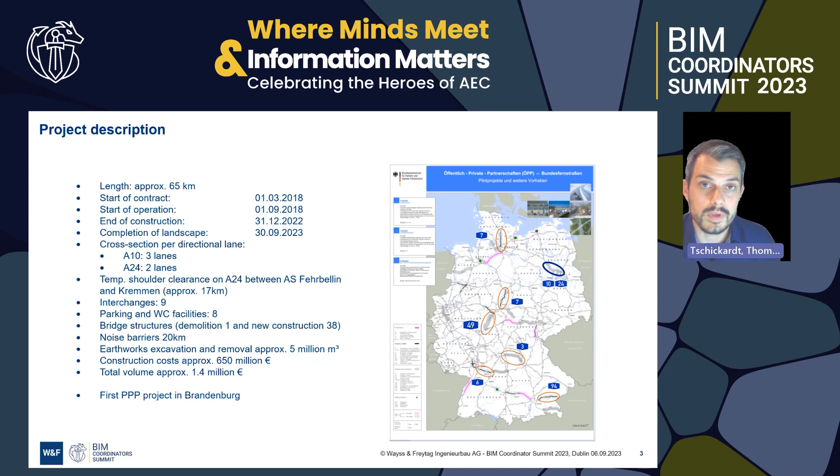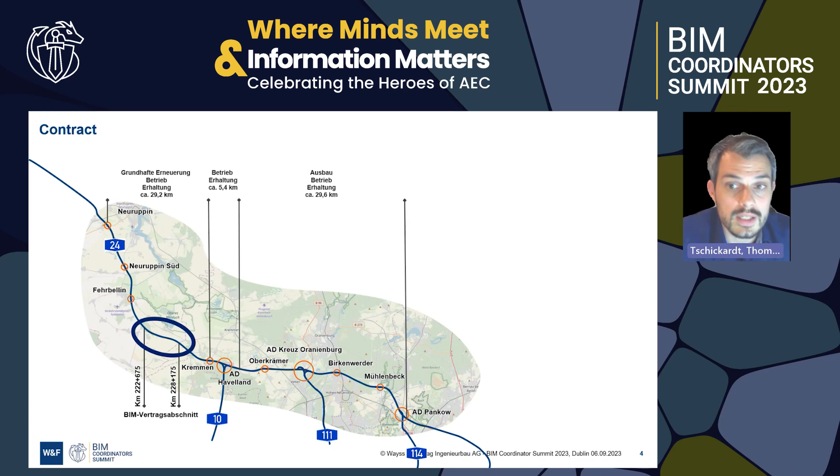The contractual route you can see here in the overview from Neuruppin to AD Pankow. The contractual requirement was to do 1 section with a BIM method. We chose the 4th section, which is now highlighted in yellow. We have highway construction of 5.5 kilometers, 1 bridge, a noise barrier wall, and 1 service station, Linumer Bruch Süd. But we also had to do the other side of the service station, Linumer Bruch Nord, as well.

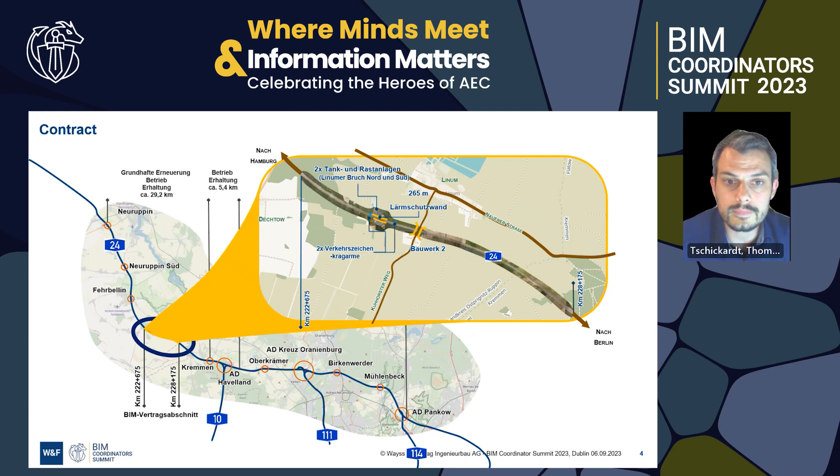Our project organization looks like this. The client was the federal government of Germany, represented by the Autobahn GmbH and also by Deges. Deges had 1 BIM manager. She was quite involved in the project, and I'm the BIM manager of the SPV, the Havellandautobahn GmbH and Co. KG, which was and still is responsible for the project. Our construction joint venture is Habau and Wayss Freytag, each 50%, and the operation and maintenance company consists of Habau as well, but also Invesis.

We decided to include 5 designers in the project for the terrain, for the soil, for the highway, for the tank and service area, but also for the civil engineering structures. And each designer had a BIM coordinator, but also a BIM modeler to produce the models.

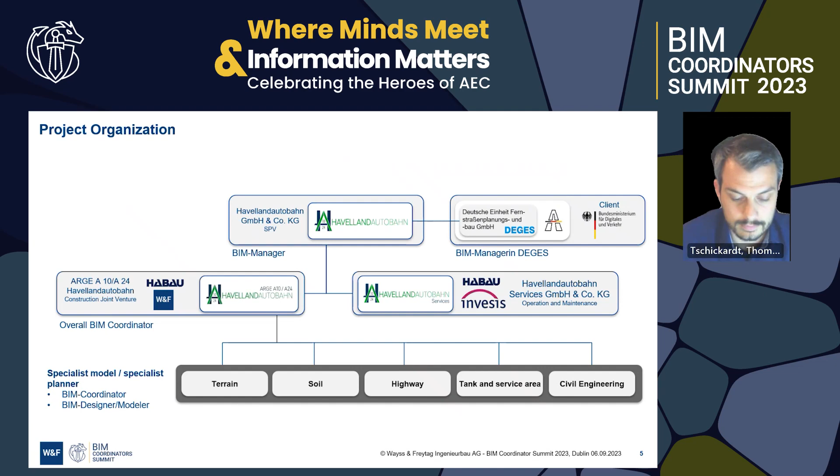Our BIM use cases around the life cycle are displayed in the background. I will show you our contractual requirements in the following slides, but what did we have to do? The generation of BIM documents was one of the BIM use cases. We had to do the creation and updating of the specialist model, model-based visualization, provision of the delivery objects according to ISO 19650, the BIM coordination in our CDE, and the derivation of 2D drawings from the special models.

We had to do a 4D construction sequence planning, but also the target-actual comparison. And we had to do the linking of all the drawings, plans, documents, photos with the model, like linked data. And in our operation and maintenance phase, the visualization of the maintenance measures and the visualization of results according to German standards. 2 additional BIM use cases were BIM to field, but also the 5D quantity takeoff and controlling.

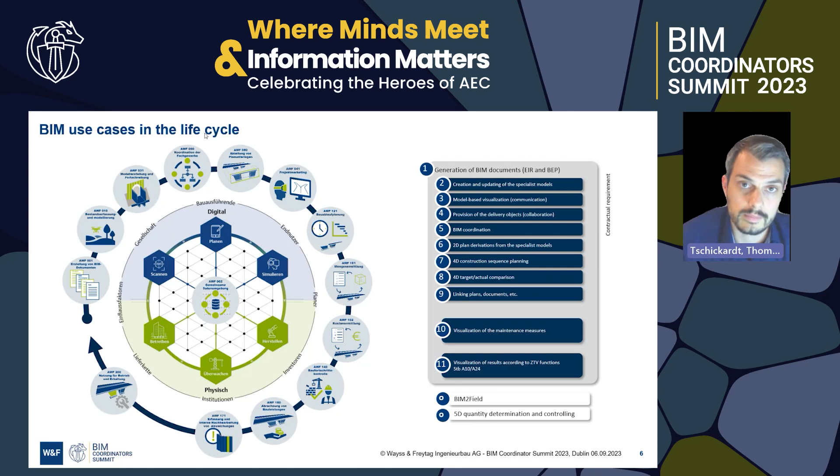The generation of the BIM documents was also one of our responsibilities. So 3 months after the beginning of the contract, we had to deliver the EIR because it was and still is a PPP project. And 6 months after the beginning, we had to deliver the BIM execution plan. And we updated the BIM execution plan 2 times during the construction phase, and also 1 time now after completion. So we're still working on the document because it's always changing or always getting better, and we want to optimize, of course, our workflows as well.

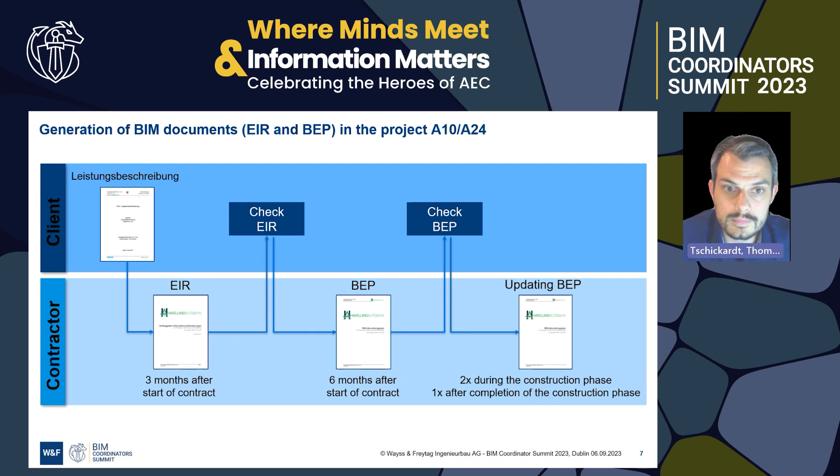Here is an overview of the appendices of our BIM execution plan. I won't go into detail and I won't show you all the documents. If you're interested, just send me a text and then we can look into it.

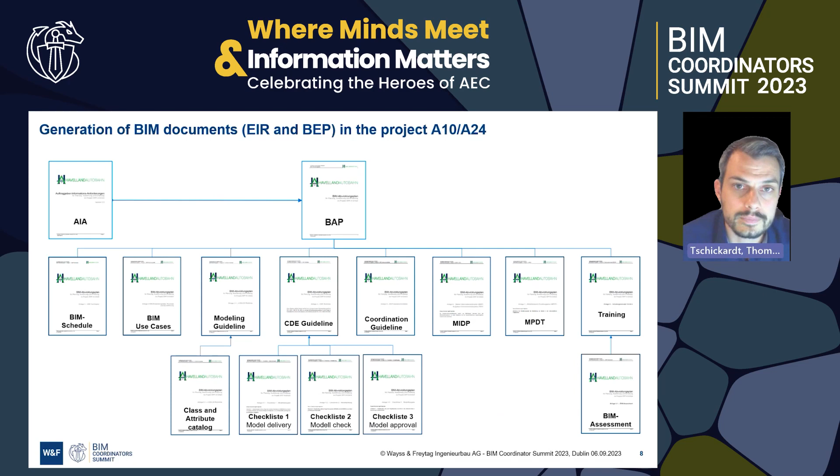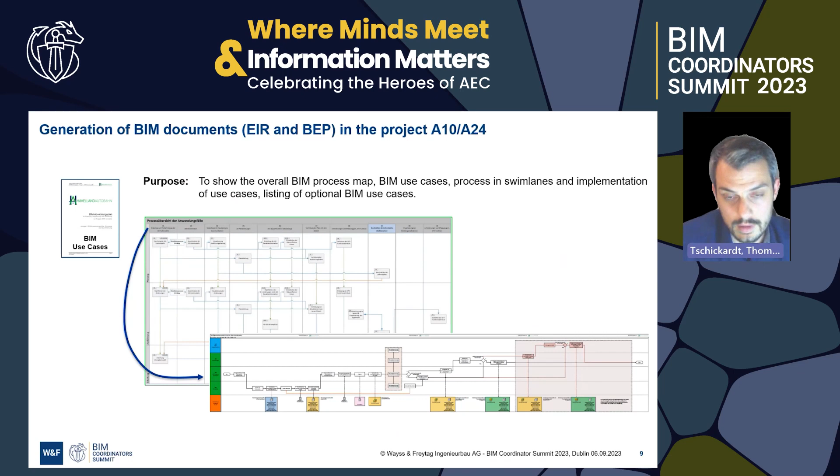But I want to show you the document of the BIM use cases, because we did develop a BIM process map for all the BIM use cases. As you can see here, processes in the swim lanes according to BPMN and the implementation of your use case in the project. So everyone knows who is going to deliver which information in which quality at which state. Here you have a picture in large, so you can see it's quite detailed, and it did work quite well.

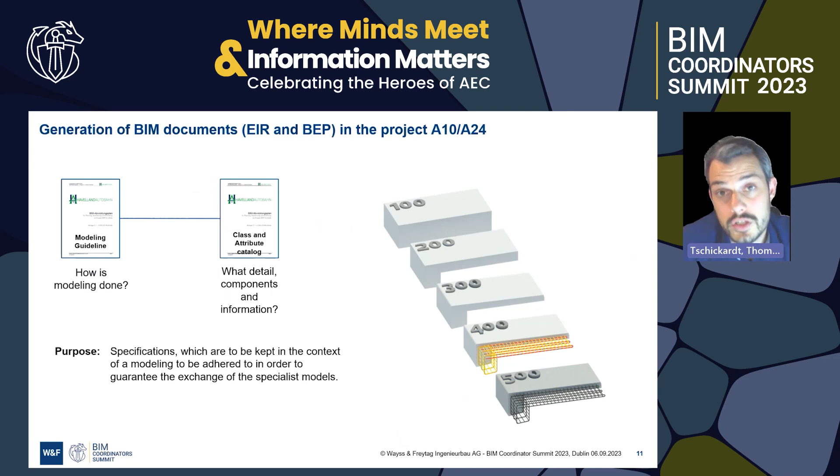The quality assurance also plays an important role here, because the CDE guideline specifies the process for collaborative working. It establishes the review criteria for the model check, but also the approval process, etc. So we were working with the container status according to ISO: work in progress, shared, published, and archived.

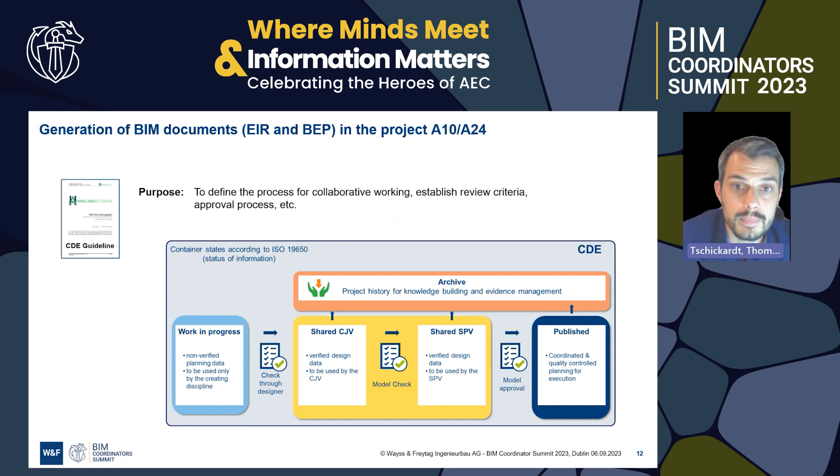The coordination guideline then specifies the requirements and the procedure of the BCF communication. So all the designers know how to exchange the BCF format, because it was still in development at the beginning of the project, because we had no software information flow without any errors. So now we have no errors, but in the beginning it was quite chaotic.

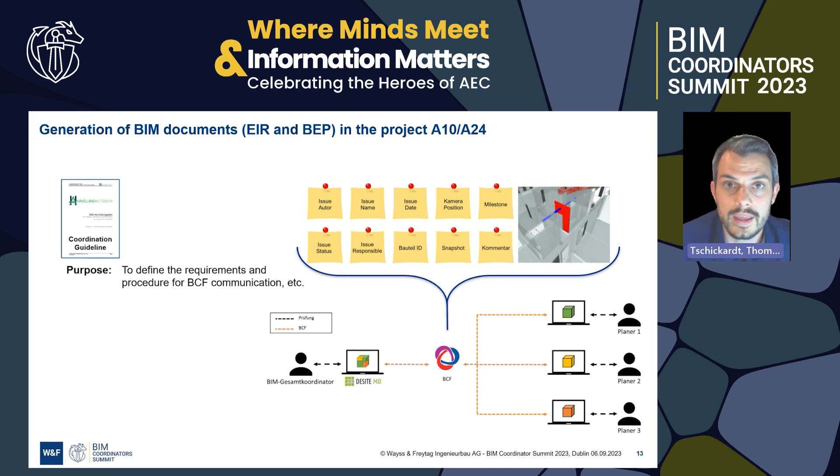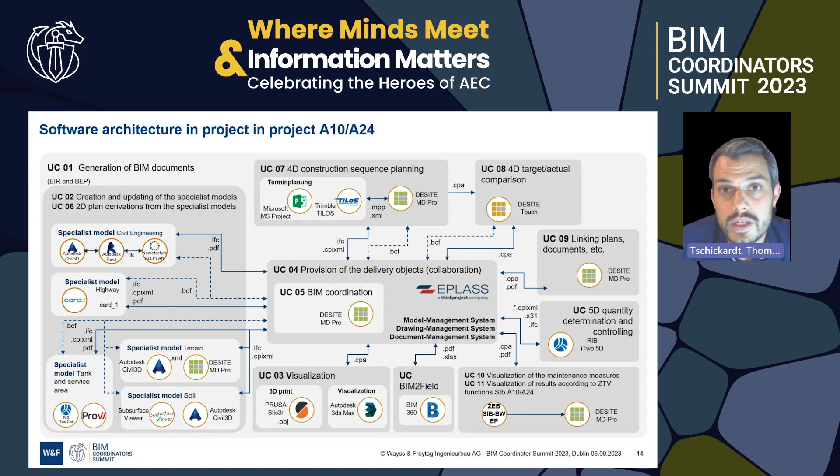Chaotic is also our software architecture. It does look complex. It's not as complex as it looks. I hope in the future we only have maybe 1 or 2 softwares, or maybe, let's say, 5. It was quite the challenge to specify the information flow, so that all the information gets into the softwares where we need it to be. One of our main software is DESITE, which we are also using for the quality assurance process. Just have a look at the presentation slides or just pause the video and look into it.

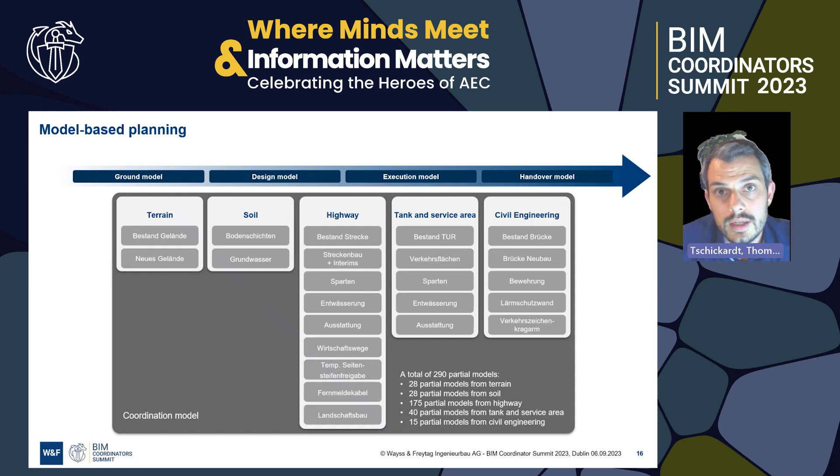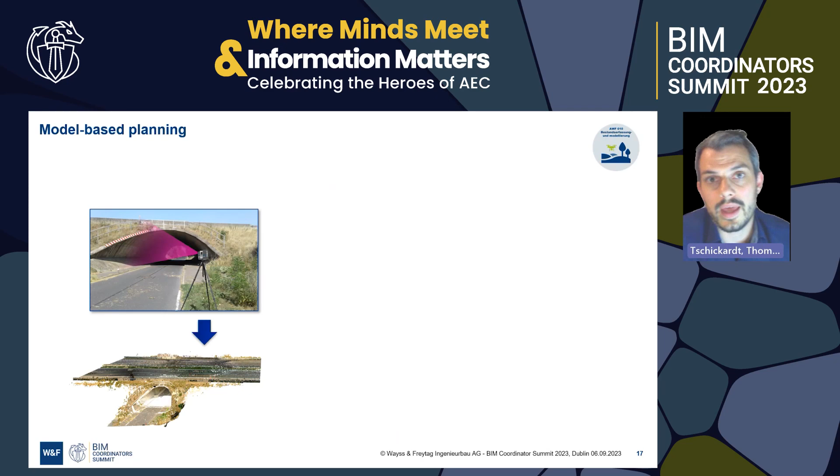So let's get into the model-based planning. For the bridge structure, we did a laser scan with the terrestrial laser scanner, as you can see here. A point cloud was taken as data acquisition and then transformed into a BIM model, as you can see in the process behind me. Nowadays there are maybe better scan-to-BIM processes, but it did work for our project.

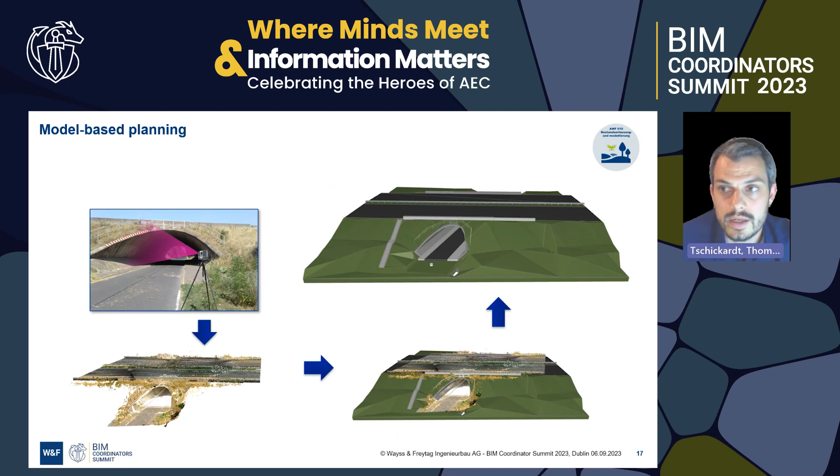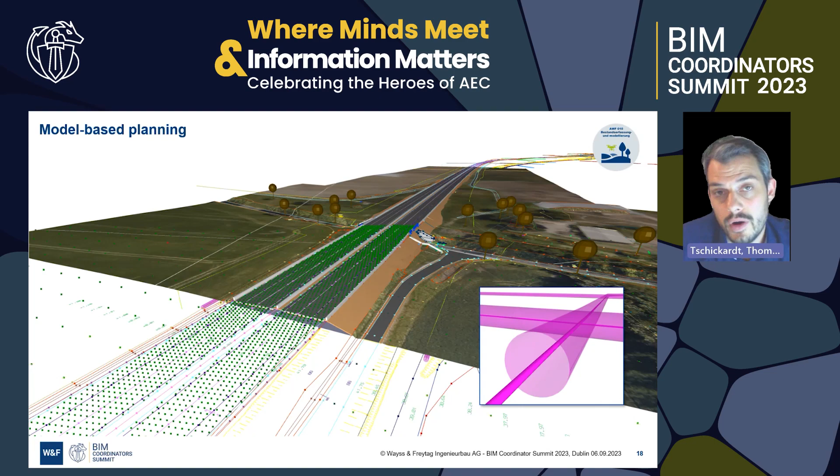We also had the whole highway captured by different sensors, as you can see here by all the lines and the dots. We then did the modeling of the existing condition outside. So what you see here on the slide was the existing highway before our construction, and it was the basis for our design and planning.

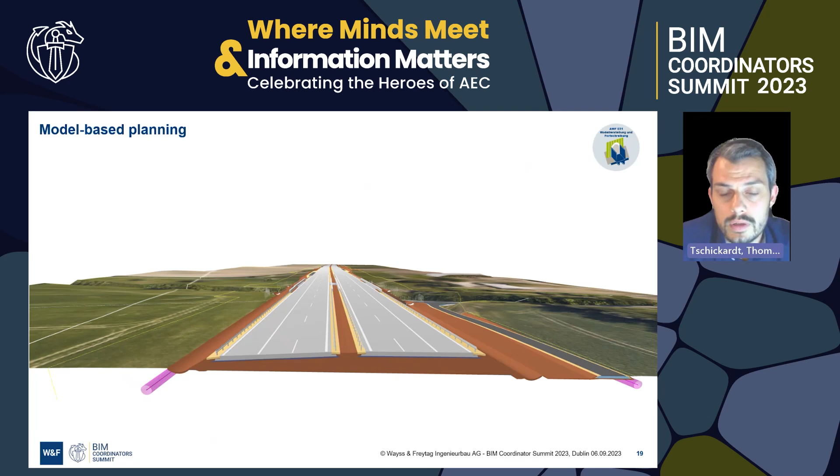This now is our execution model with all the different partial models. You can also see pipes underneath the terrain, indicated by quite a large volume. The volume was done because we didn't know exactly where the pipes were, and we wanted to give the construction manager an idea where the pipe could be. You also see the fence in the background, also different lines, etc. So this is our execution model for the highway.

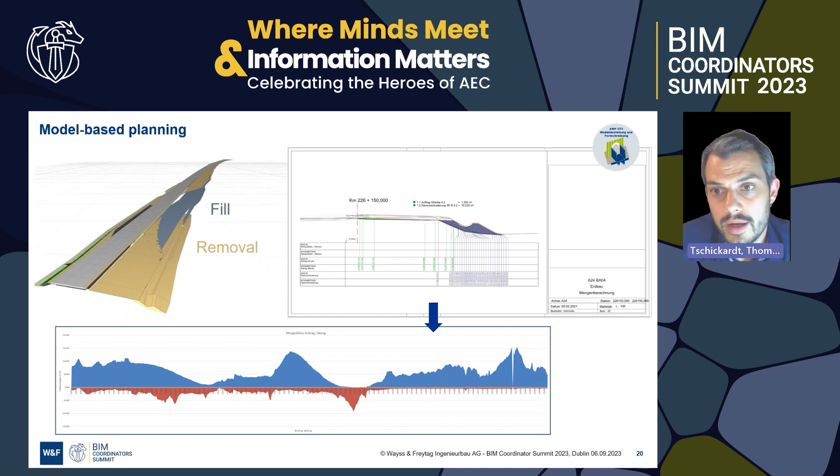We did try to do a perfect fill and removal. As you can see here, it didn't work. It couldn't work quite well because it was our last section. So we had to consider all the other fills and removals of the other highway construction works. And as you can see, we had to do a lot of filling up the area. So we had to carry a lot of earthworks into our section.

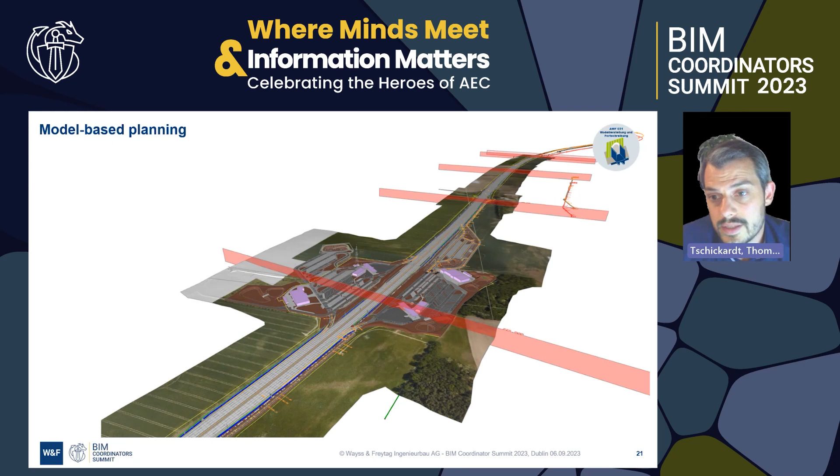Here you can see the service station Linumer Bruch Nord and Süd, North and South, which were an extension of 45 parking areas for trucks in the upper area.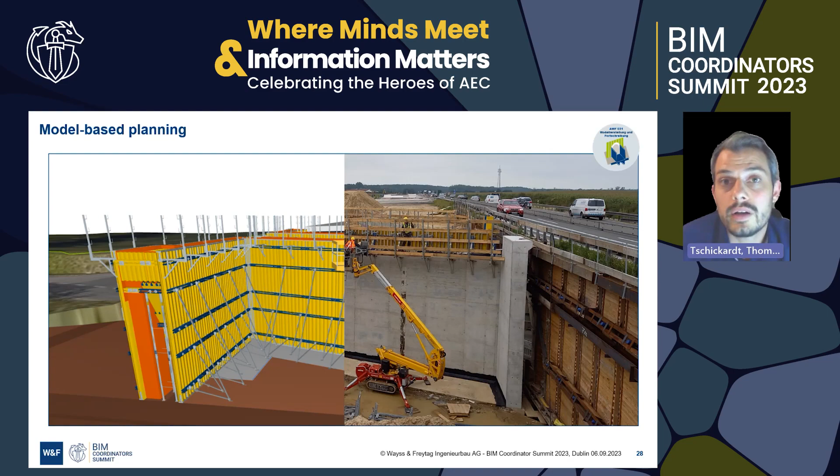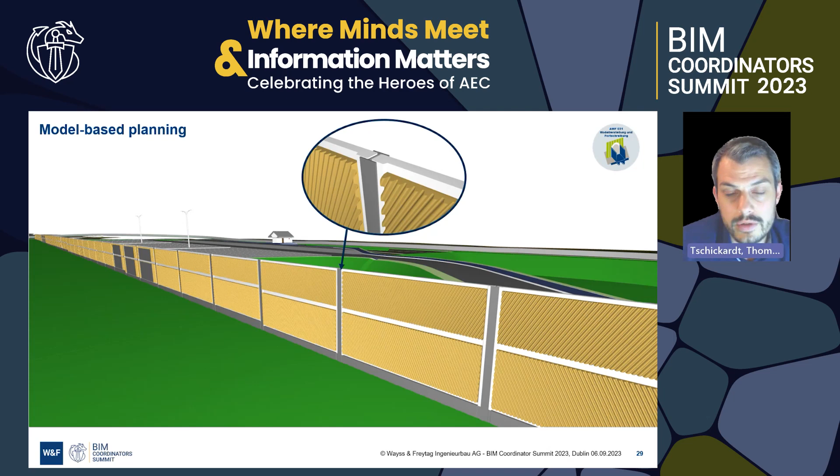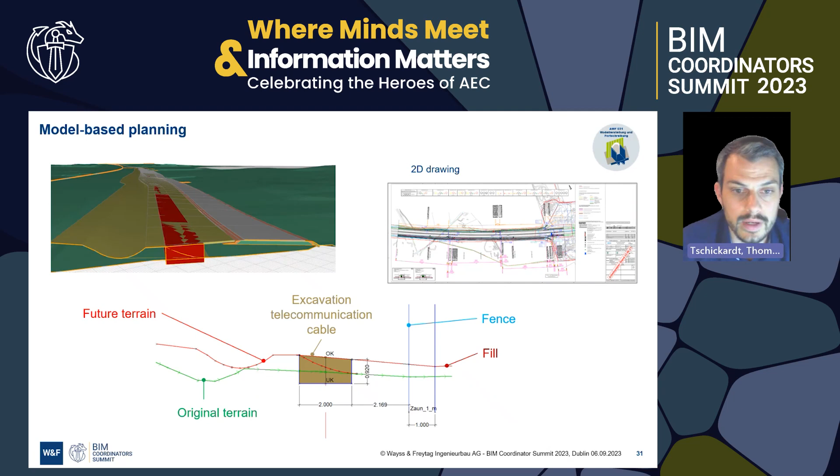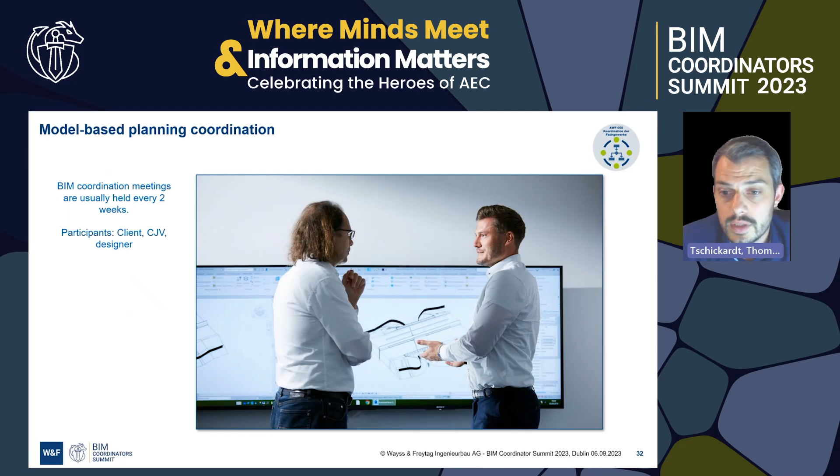Or the BIM models, when they're used in the BIM coordination meeting, which are usually held every 2 weeks. Participants were the client, the construction joint venture, and also the designer. During those meetings, we could identify that the grouted anchors needed an overlay of 5.0 meters. Sometimes we had, as you can see here, only 4.5 meters, so we had to do another fill-up. Sometimes we had 7.5 meters, which was then enough.

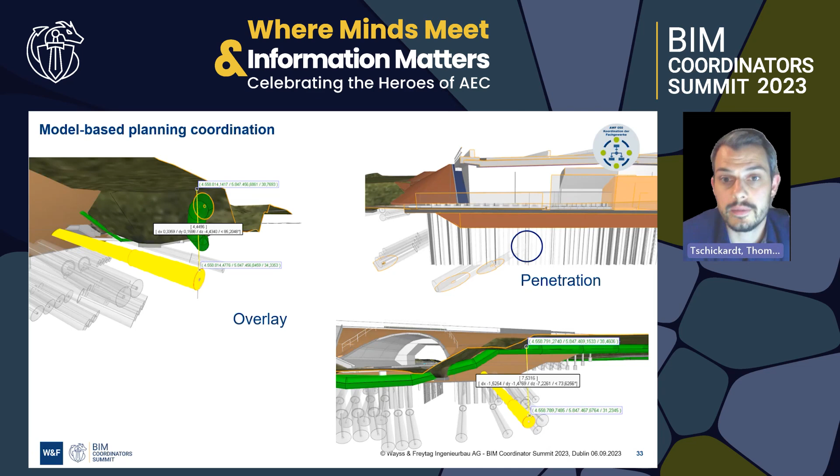But we could also, as an example, identify the penetration of the sheet pile wall, so we had to do another design. We also designed the pedestrian guidance, highlighted in the red transparent color, so we were safe from the ongoing traffic.

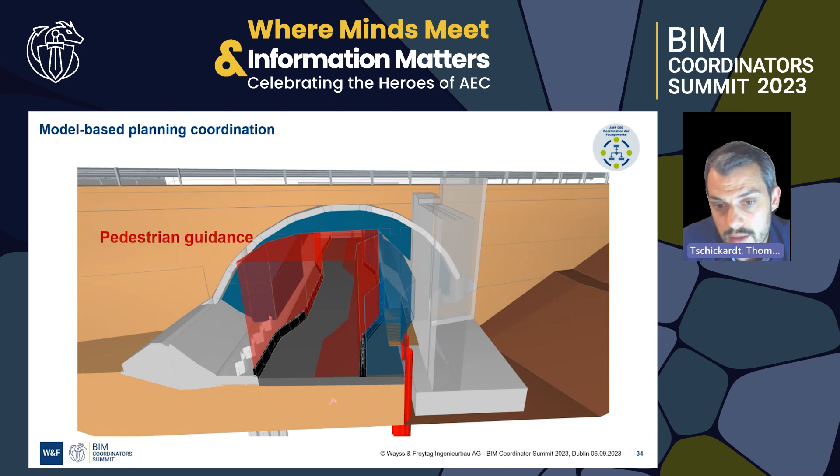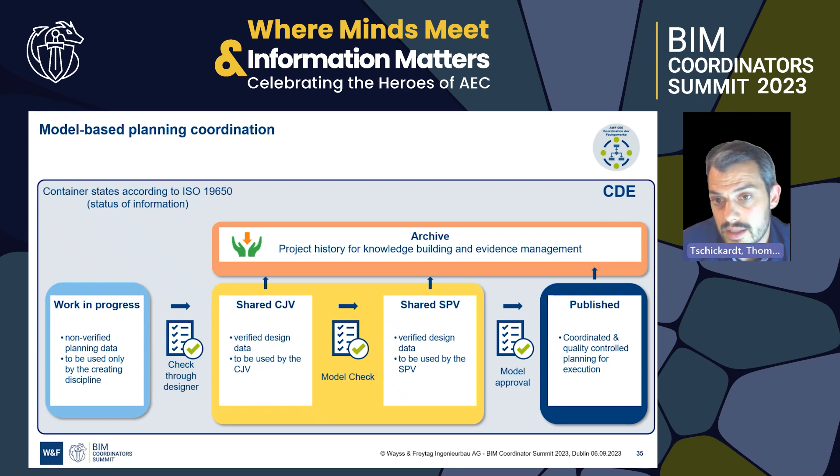All the models were then going through a specific workflow. In the beginning, they were a work in progress. The designer did a check by himself. They sent it to us, to the construction joint venture. We did quite an extensive model check and the model approval, and then we sent it to the published container status, and all the other indices are archived.

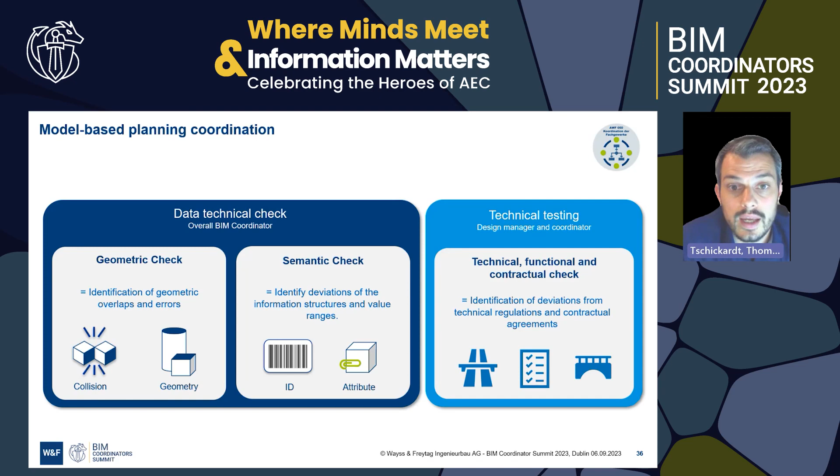Our extensive model check looked like this. The overall BIM coordinator did a technical check for the geometric, but also for the semantic collision. He checked the IDs, but also all the attributes, the semantics in the model. And our design manager did a technical, functional, and contractual check of the models.

But what does the checking actually look like? We programmed a graphical user interface for our BIM coordinator, and now we are going to prepare a quality report. In the first step, you choose the name of the approval person. You select all the models which you are going to check.

You can put in some additional data, like who did the provision of the model, in which modeling software the model was prepared, etc. Now you can see different criteria which were already filled out for the video, since we don't have enough time to do the report step by step.

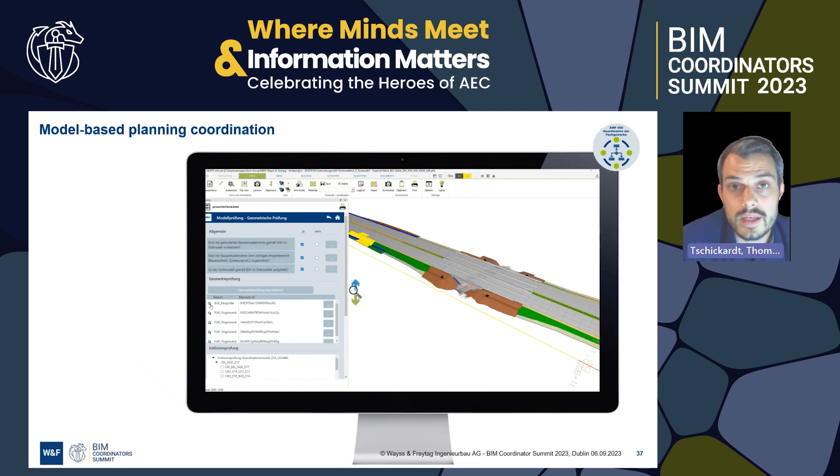In the next step we are selecting all the geometric issues which we found during the approval process. We can add another comment that the volume of the abutment wall is not closed. It needs to be redone.

We can select all the collisions which are going to be included in the report, from internal checking, but also external checking with other partial models. The semantic checks are now selected in this step, also included in the quality report.

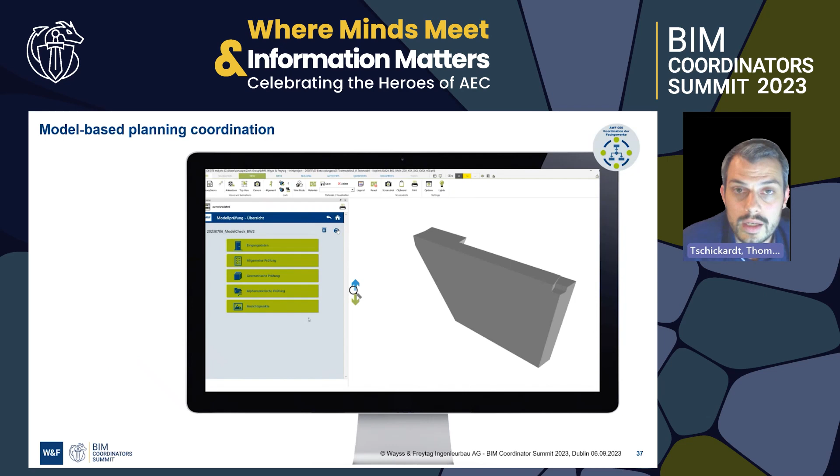In the next step, you can also add additional viewpoints into the model. You just prepare them beforehand, and then you can include them in the report here. And in the final step, you choose what needs to be included into the quality report, add another comment, and add all the appendices to the quality report.

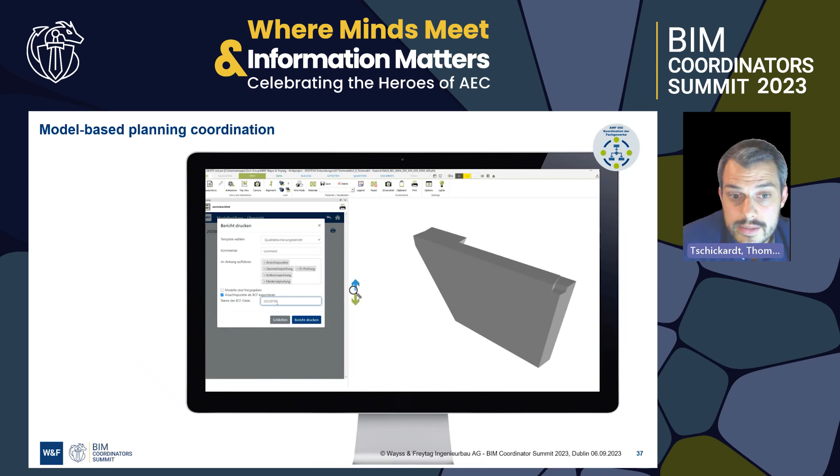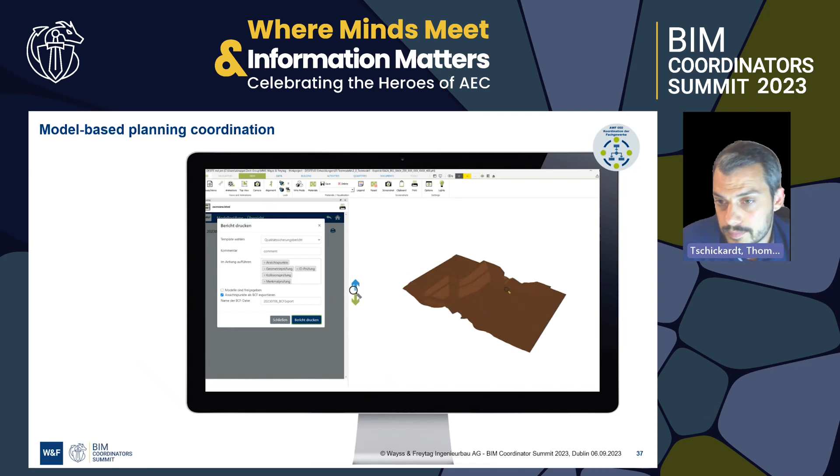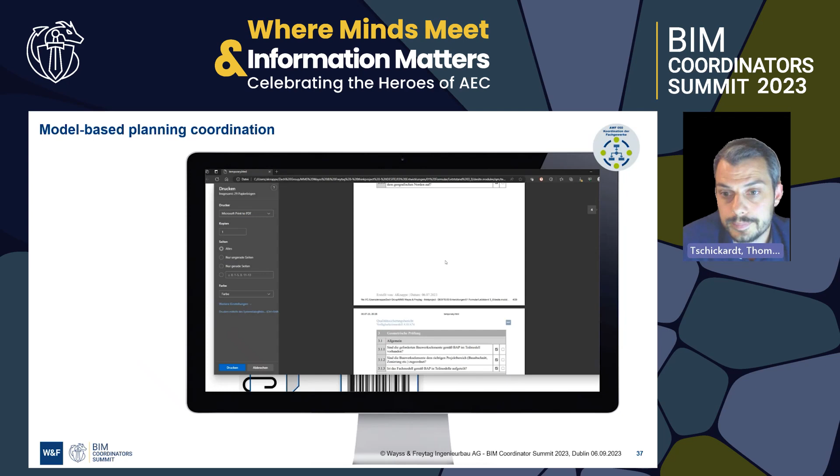Decide if you want to do an export of the BCF files as well. Here you choose the name of the BCF file, and then you print the report and also save the BCF. BCF was saved. And the PDF report is now shown here, and you can distribute it to the designer and to the client as well, and all the checking is included in the report.

So how is the information used during the construction phase? All the drawings, site plans, cross sections, formwork, reinforcement, all the drawings that were derived from the model are then used for construction, and you can retrieve them through the model. So you just select any model element, and the data is linked according to linked data, and it worked quite well.

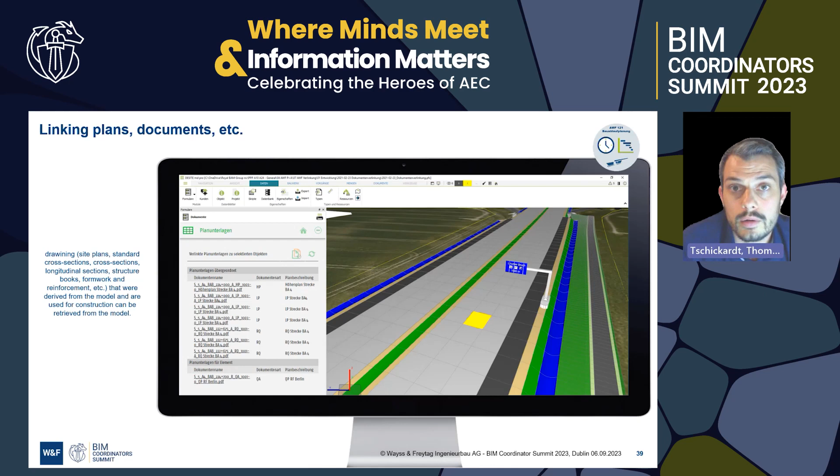All the quality documents are also linked to the representative model element, but also the construction site photos are to be found in the BIM model as well, as you can see here. So you just go anywhere in the model and you get all the information you need in the construction phase.

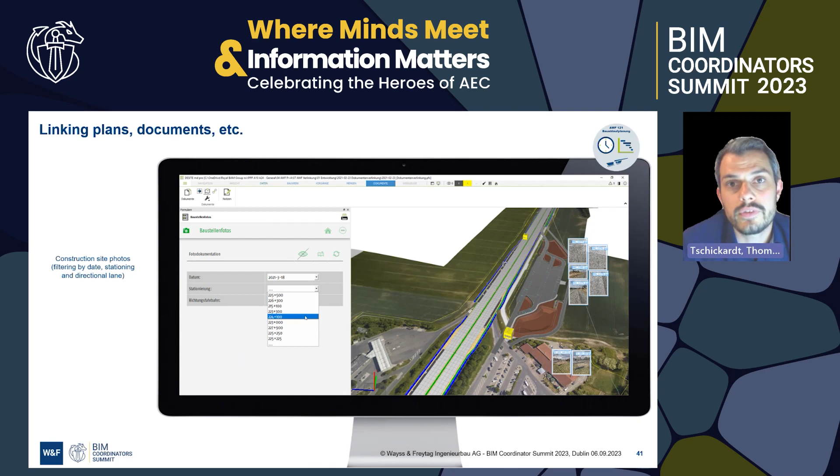I didn't bring you any 4D sequence video because I don't like them. They are just rubbish because you need to work with the 4D model in the meetings as well. So I just brought you pictures as an example, because we have seen a lot of 4D videos, so we don't need to see another one. So here you can see the construction sequence of the foundation, but also the abutment walls as well.

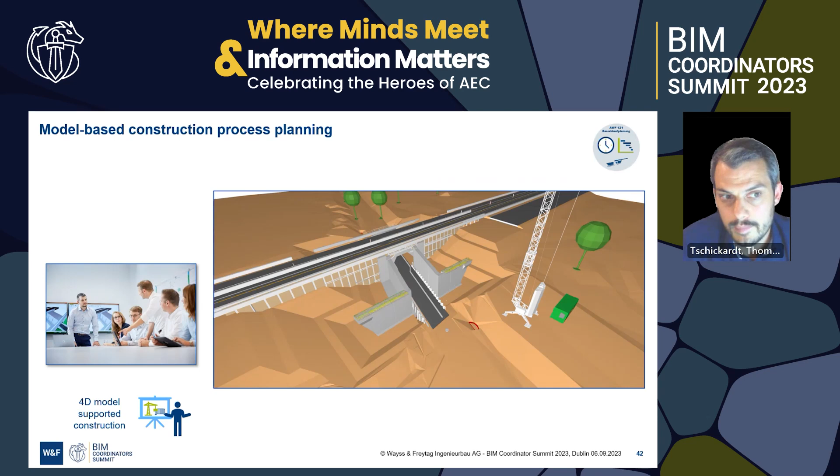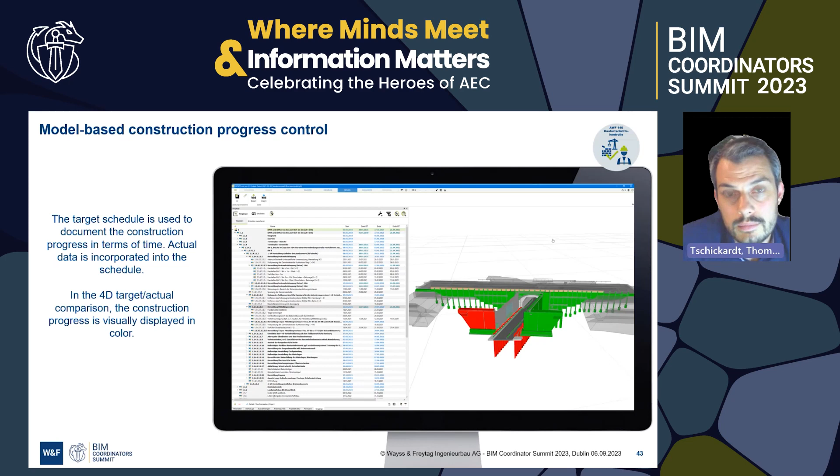So the target schedule is used for the documentation of the construction progress in terms of times. The actual data is incorporated into the schedule by our construction managers, and the comparison of target and actual is then visually displayed with different colors in red and green, as you can see here.

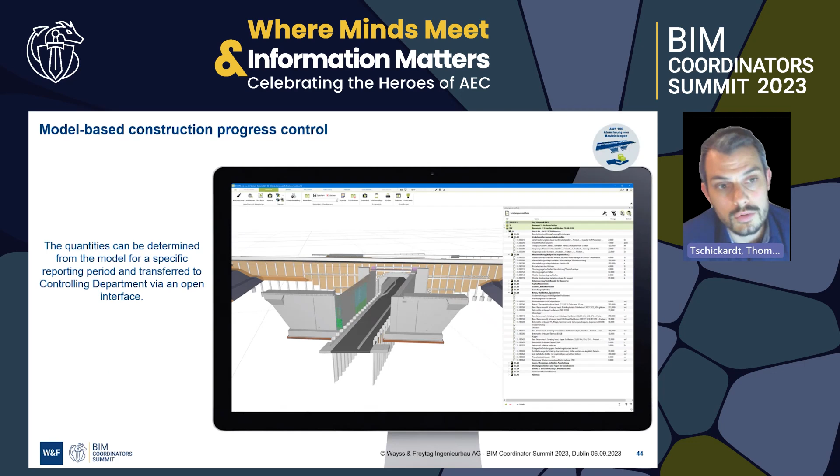And the quantities can be determined from the model for a specific reporting period, for example, for a month, for a year, etc., and then sent to the controlling department via an open interface. So let's get into the challenges. We do need, of course, in the first step, BIM-capable clients.

Our client was not BIM-capable at the beginning of the project, so we had to do our own EIR, which we could do, and we would do it another time, but this shouldn't be the process. And also the basis models, the models of the existing condition, should be provided by the client as the basis for our 3D design.

We do need a strategic development of BIM across the entire value chain. So we should and we must include all the consortium partners, the designers, subcontractors, manufacturers, etc. So everyone needs to be included. Maybe alliances or IPD, partnership-based project management, are the solution for this challenge.

And then we do need an IFC format which works. We exchanged all our BIM models by IFC, and it did work, but we didn't use the IFC entities as we should. So we manipulated our BIM models for our use cases, so we could implement them. But next time, I want to use all the IFC entities as given in IFC 5 or IFC 6, I don't know. And then I will slide to the side.